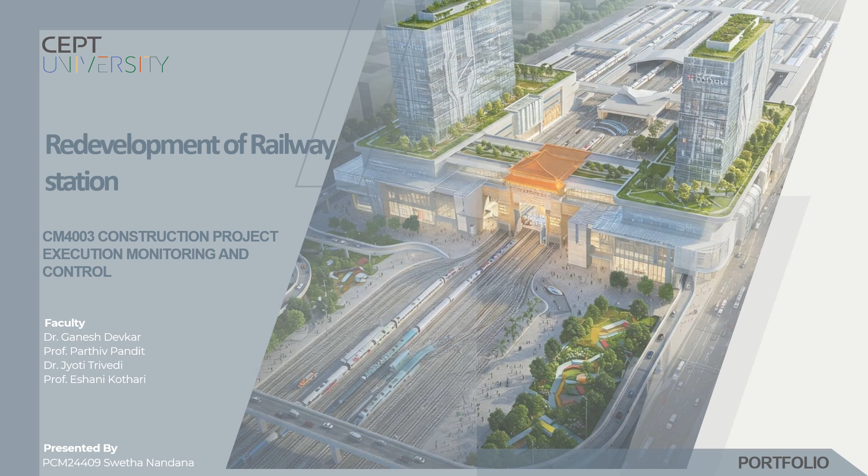The second semester study of Construction Project Execution, Monitoring and Control aims to groom building construction managers to observe, analyze, and reflect on the construction processes performed at various construction sites.

I will be presenting our project, the redevelopment of the railway station. This is a transformative project located in Ahmedabad, aiming to enhance its role as a critical transportation junction connecting railways, metro lines, and the upcoming high speed rail network. By blending contemporary design with cultural heritage elements, the redevelopment seeks to improve passenger experience and boost the city's economic growth. The project focuses on integrating modern infrastructure with sustainable technologies to create an eco-friendly transit environment.

The features include a world-class transport hub, spacious waiting deck, smart ticketing system, metro, BRTS, and bullet train connectivity. The project cost is estimated at 2,400 crores, with the project area spanning 125 acres. The type of contract is EPC, and the completion timeline is expected by 2027, which is 36 months as per the contract. The concourse level is 54,900 square meters with retail and amenities.

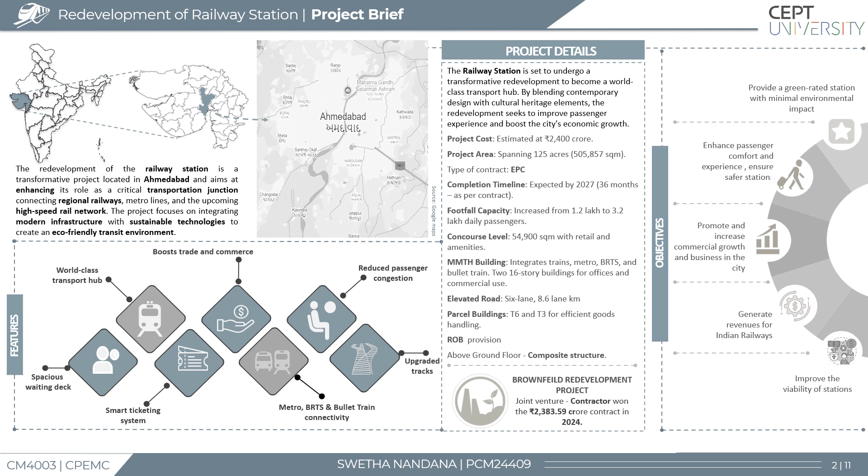The MMTH building, which is the Multi-Modal Transport Hub, integrates trains, metro, BRTS, and bullet train. There are two 16-story buildings for office and commercial use. It is a brownfield redevelopment project and a joint venture, which the contractor won at 2,383.59 crore in 2024. The objectives include providing a green rated station with minimal environmental impact, enhancing passenger comfort and experience, ensuring a safer station, promoting commercial growth and business in the city, generating revenues for Indian Railways, and improving the viability of stations.

Pre-construction activities. This section includes all the pre-construction activities and analysis involved, which includes the water requirement analysis.

Borewell serves as the primary water source for the batching plant, labor colony, and MMTH. At the batching plant, specialized borewell supplies water for concrete manufacturing, curing, and other building activities. Drinking water is supplied through water cans, with a daily consumption of 5 water cans for the labor and the lab personnel. For sanitation purposes, water from the borewell is used.

At the labor colony, a borewell meets the labor colony's bathing needs. Two water tanks supply water for household and sanitary purposes, and one water tank for drinking. At MMTH, the depth of the borewell is 500 feet and the pump power is 10 HP, and the cost of setting up the borewell is rupees 5 lakhs.

One water supply tank is provided for drinking purposes, and also a few water cans are present at the excavation site. At the staff office building, two water tanks are provided, and a steady supply of water for drinking is provided, as well as for washing and general office use.

For electricity, a DG is present at the batching plant, MMTH, quality lab, as well as the elevated road. For quality, a well organized and established quality lab is set up near the batching and mixing plant, conducting various tests.

There are various approvals taken for the redevelopment of the railway station project, which include groundwater approval from the Central Groundwater Department Authority, pollution control from the State Pollution Control Board, Environment Management Plan, Environment and Housekeeping Management from the Railway Board, as well as permission for tree cutting from the Forest and Wildlife Department, Gujarat.

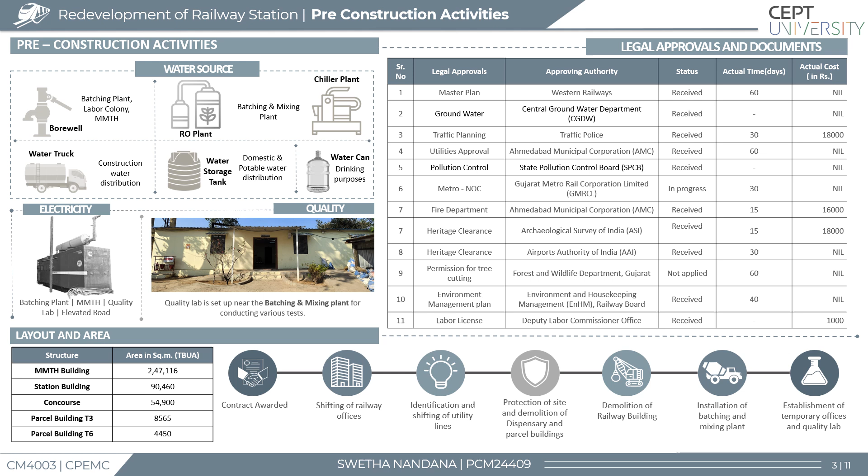The different elements in site mobilization include contract award, shifting of railway offices, identification and shifting of utility lines, protection of site and demolition of dispensary and parcel buildings, demolition of the railway building, installation of batching and mixing plant, and establishment of temporary offices as well as the quality control lab.

Now talking about the machine and equipment at site. The layout plan is divided into 6 zones and the tower crane is marked in zone 5. Bar bending machines and bar cutting machines are distributed across multiple zones. Power supply lines, distribution boxes, and DG sets are also strategically located. There are two different types of DG sets: one provides electricity to the different distribution boxes, whereas the other provides electricity to the tower crane in the center.

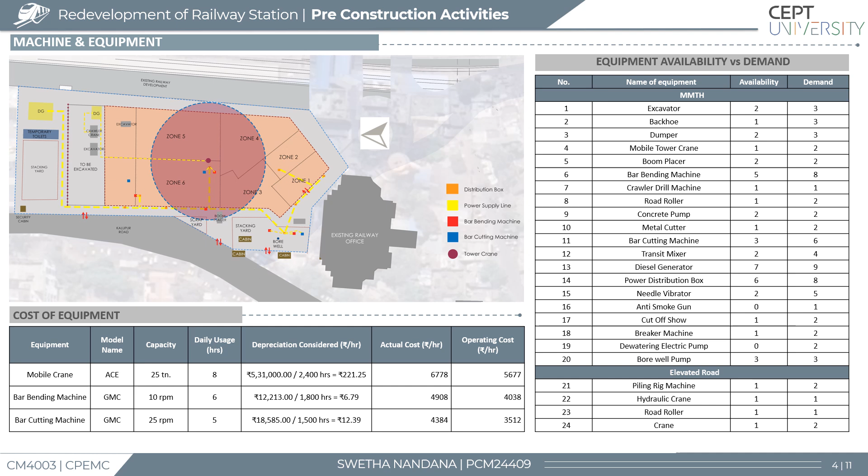Now, talking about the equipment availability versus demand table. This table shows the availability and demand of various construction equipment. In several cases, the demand exceeds the available equipment, such as for the bar bending machine and diesel generator, which could lead to potential shortages. Items like the anti-smoke gun and dewatering electric pump have no available units, indicating an urgent need to procure them.

The Linear Responsibility Chart (LRC) is a structured tool that defines work responsibilities, assigning roles, authority levels, and resources to specific tasks within a project. It enhances communication, coordination, and efficiency by clearly outlining relationships between project activities and ensuring clarity in roles.

A total of 37 quality related activities were identified, of which 12 are defined in the pre-construction stage, 20 in the ongoing construction stage, and 5 in the post construction stage. An LRC was prepared for client, contractor, PMS, and third party and design consultant. The LRC of the PMS and third party, as well as the contractor, are clearly defined in the following slides.

This is the organization chart for the PMS, that is the authority engineer, as well as the third party testing agency. The personnel involved in quality from the PMS side are the chief resident engineer, principal quality engineer, followed by the senior quality engineer, and the principal safety engineer.

The personnel involved from the third party testing agency in quality related activities are the quality manager, followed by the senior quality engineer. The senior quality engineer monitors material sourcing and testing, ITP review, and statistical analysis and reporting.

The principal safety engineer follows safety compliance and quality assurance, risk assessment, and hazard management. The chief resident engineer is involved in material and workmanship control, non-conformance management, and training. The quality engineer is involved in quality assurance compliance, documentation, and reporting. The testing engineer is involved in material testing and validation, field and laboratory tests.

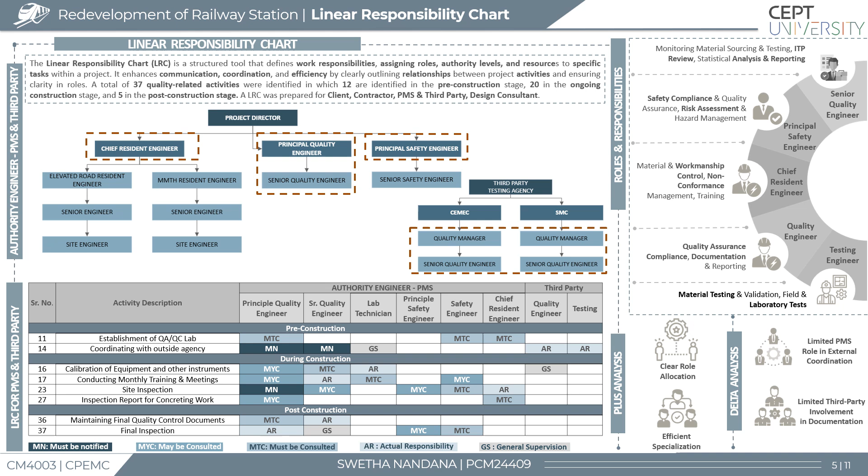After doing the analysis, in the plus analysis, clear allocation of roles and efficient specialization are involved. In the delta analysis, limited PMS role in external coordination and limited third party involvement in documentation are identified.

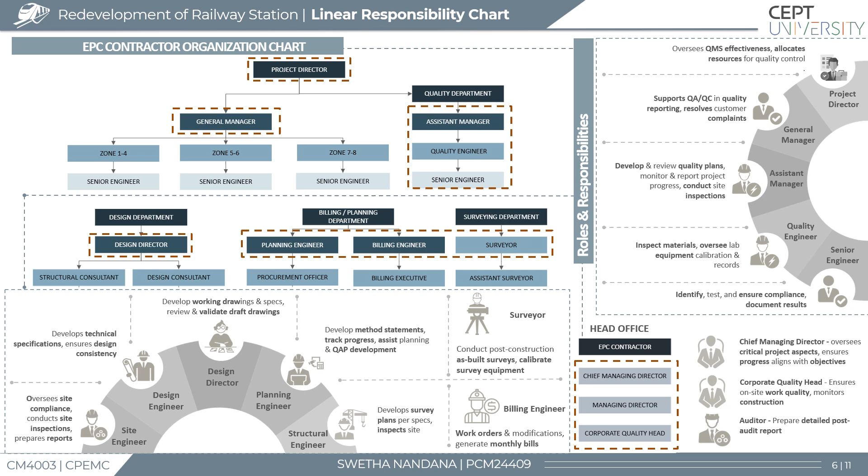Personnel involved in quality from the head office are the chief managing director, who oversees critical project aspects and ensures the project aligns with objectives; the corporate quality head, who ensures on-site work quality and monitors construction; and the auditor, who prepares detailed post audit reports.

This is the linear responsibility chart of the contractor, which outlines the distribution of responsibilities for quality within an EPC firm and a contractor organization. It highlights the involvement of project managers, quality engineers, and auditors, ensuring compliance with quality control standards.

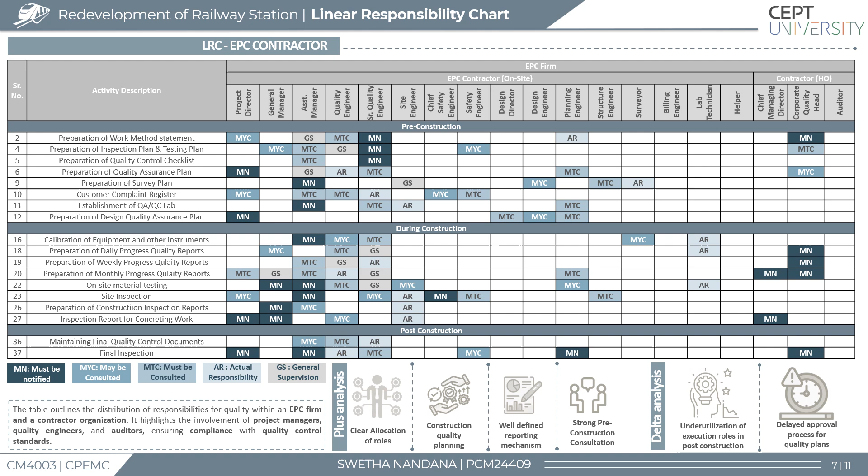The plus analysis includes clear allocation of roles, construction quality planning, a well-defined reporting mechanism, and strong pre-construction consultation. Whereas the delta analysis includes underutilization of execution roles in post-construction and delayed approval process for quality plans.

Quality control laboratory is a crucial part of a construction site, ensuring that all materials and processes comply with required quality standards. It plays a key role in testing construction materials such as steel, concrete, aggregate, and soil to verify their compliance with project specifications and legal requirements. By conducting thorough material analysis, the lab helps detect potential issues early, allowing for timely corrections and preventing defects.

The quality control lab for our project is positioned at the batching and mixing plant with a total area of 252 square meters, which includes a security head room, quality control manager room (which includes persons from both the contractor as well as the PMC), engineer's room, cement testing room, equipment testing area, and a washroom.

After thoroughly going through the layout, a few areas of improvement are suggested, which include a revised layout plan, material storage space, equipment backup, and a test platform for certain equipment such as the aggregate impact height, as well as fire safety measures.

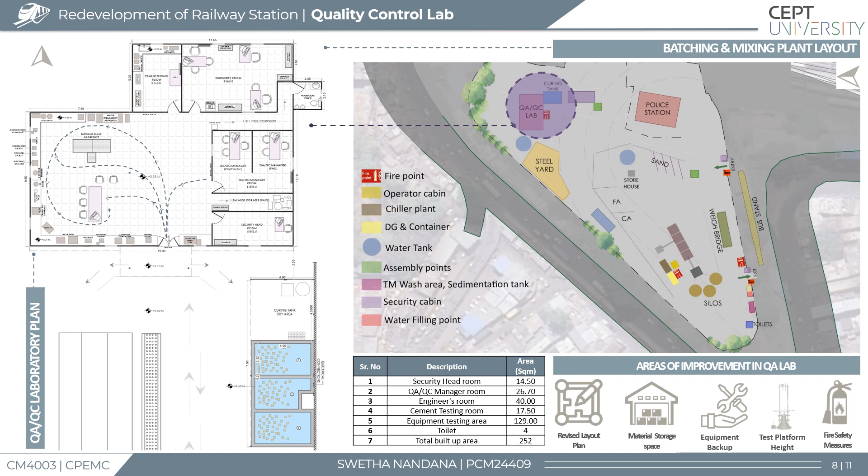Quality organization structure. The chart illustrates the hierarchical structure of the quality department. At the top is the senior leader who is responsible for overseeing the quality control.

Then the assistant manager who manages quality related activities specific to each site. The quality engineer then serves as a link between senior management and the various teams on site. And then the senior engineer who is in charge of supervising both laboratory and field operations.

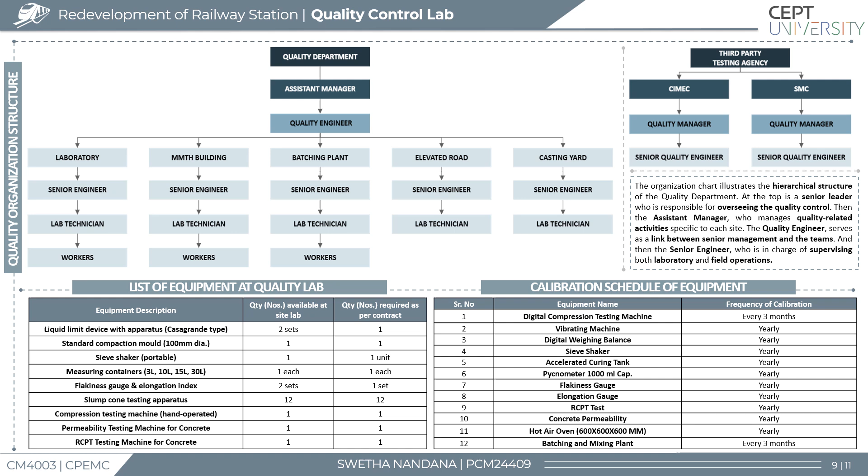List of equipment at quality lab. As per the table, the equipment available at the site matches the demand as per the contract. Calibration schedule of equipment: the calibration schedule of every equipment at the site happens yearly, whereas the digital compression testing machine and the batching and mixing plant calibration happens every 3 months.

These are the conclusions derived from the above three assignments. Pre-construction activities: the project relies on diesel generators due to delayed power connections. Although the water system with borewells and an RO plant is solid, equipment shortages may pose future risks. Site mobilization was well sequenced with demolition surveys and the setup of a batching and mixing plant and a labor colony. Efficient budgeting, early approvals, and regular status tracking helped reduce delays and ensure regulatory compliance.

Linear responsibility chart: the PMC handles quality and documentation while third party provides validation, though limited cross checks may cause compliance issues. Contractor leads inspections and reporting, but delays due to excessive consultations affect progress. Empowering on-site roles and streamlining approvals can enhance efficiency.

QA/QC lab layout: the 252 square meter QA lab is near the batching and mixing plant with a curing tank, but lacks proper storage and fire safety. Better space use and safety upgrades are needed. Regular calibration and backup equipment are crucial for continuous and reliable testing.